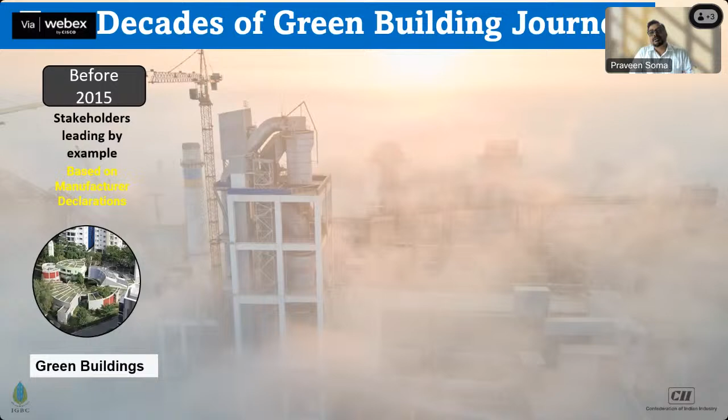As I told you, my topic is the paradigm shift. I'm going to talk about things related to past, current, and future, how it is going to happen. Before 2015, many stakeholders were leading by example, meaning nobody was pushing them, they voluntarily walked the talk. You talk about Godrej, Wipro, ITC, everybody championed the cause of going green by setting an example. They're inspirational buildings, starting with our own CII Godrej GBC building in Hyderabad in 2002. Today we are talking about so many building projects only because many projects already implemented on the ground showcase and inspire many architects today.

Then we saw the launch of Green Pro in 2015. Before Green Pro, we used to take declaration from manufacturers saying that my product is green, declaring 15% recycled content, or sourcing from 400 or 500 kilometers from a location. We had to depend on the declaration of the manufacturers. But once we have the Green Pro Eco label, due diligence is completely cleared, because it is a third party eco label, hence that is avoided. Just by having a Green Pro certificate, we used to clear the projects now.

Post 2016, we saw expansion of IGBC rating programs. We only had the IGBC new building rating program and IGBC green homes rating program. By 2016, we expanded to almost 34 rating systems, depending on building typologies. The ratings have been emerging. We developed rating programs with the help of a lot of stakeholders, maybe part of transit, railway, or green homes developed by 100+ stakeholders. Then we developed green cities, green townships, then 4-5 years back, net zero energy, water, waste, and last year we launched carbon. With every evolution, we are upgrading the rating programs, which is shifting from green buildings to green built environment.

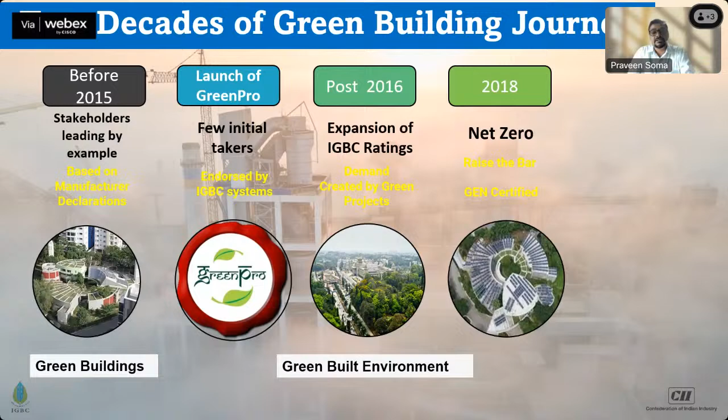Whatever energy we consume, close to 2.2 lakh units per annum, we have solar panels which are bifacial in nature, 135 kilowatt. They generate close to 2.3 to 2.4 lakh units per annum. That means it is generating more than our requirement. It's called a self-sufficient building, which is important to exhibit in the existing building, and also go green or go net zero.

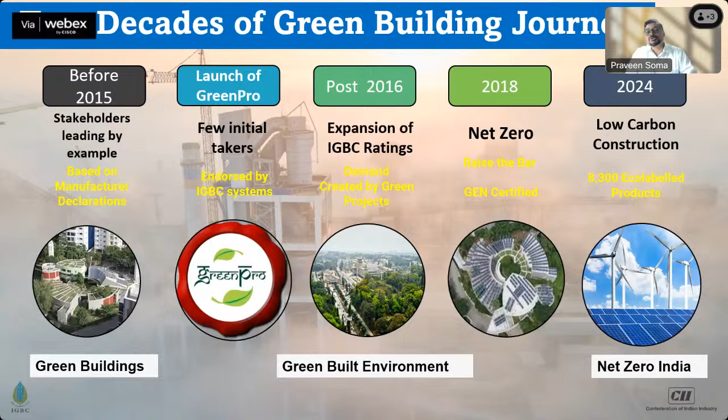That is very important. Today, I think the future is all about net zero, with vision from the Prime Minister also talking about 2070, moving towards net zero. So we should divert all our attention to more net zero projects. Even though we may have a handful of projects today, in the next 5 or 10 years you may see 1,000 projects aiming for net zero, with implementation also on the ground. We may see more technology happening.

So I've now fixed my focus onto the paradigm shift in design thinking, how it has transformed. For example, way back when we started the journey, the conventional electrical demand for 1 million square feet of a commercial building, the electricity requirement is close to 10 megawatt.

But what these green buildings did is halve the requirement. That means the load on the infrastructure is completely down by 50%. So when a building or community goes green, the load on infrastructure decreases by almost 50%. For the same 1 million square feet, these green buildings are designed such that it only requires 5 megawatt. That is the change it has brought. We never thought it could be brought down to 5 megawatt directly - that is the extent of designing.

Similarly with air conditioning, conventionally we designed open offices in a commercial building with a thumb rule of 180 to 200 square feet per ton of air conditioning. But green buildings have already showcased better. In fact, our own GBC building, we designed screw chillers, 50 tonners, for 1 ton per 350 square feet. That means 1 ton of air conditioning will cool 350 square feet.

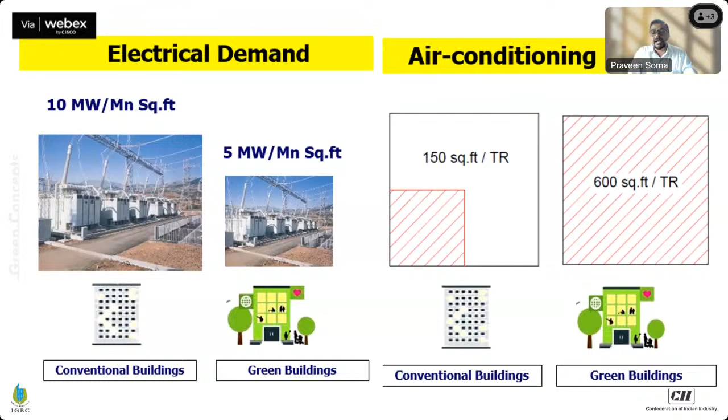So this is a paradigm shift happening in the air conditioning division. Similarly, we have seen lighting reduction. Way back, people will remember T12 tube lights with 55 watt chokes, then we saw T5 transition, then CFL transition. When you compare a T12 55 watt with a simple T5 28 watt tube light, the lighting lux level is the same, but power consumption is almost 50% reduced.

With the advent of LED lights, LED tube lights today with 10, 12, 15 watts, the lux level intensity is almost equivalent to what we achieved 10 or 20 years back, but the wattage is much reduced. In fact, we used to talk about 1.5 watt per square foot almost 20 years back. Then with the advent of green buildings, we thought 1 watt per square foot was the baseline. Today we are talking about less than 0.4 watt per square foot, with many projects achieving 0.3 to 0.35 watt per square foot, because of sensors, natural light intake into the space, and many other design factors.

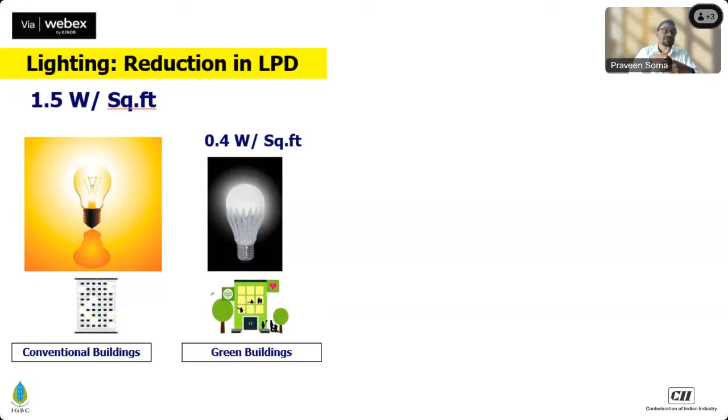So this is much reduced actually as I'm talking to you, the water consumption. How many of you remember NBC 2005? That version we used to talk about 150 to 160 liters per person per day for a residential building, and 45 to 60 liters per person per day for a commercial building. That is a baseline set by the National Building Code.

After the National Building Code got updated, green buildings established a different benchmark. We used to have 75 to 80 liters per person per day in residential projects, then less than 15 liters per person per day in commercial buildings, because in commercial buildings only urinals and water closets are there, no showers, so the consumption is much lower. Similarly in residential, we are seeing consumption per person per day reduced due to efficient water fixtures, the change in the water fixtures that we do.

For example, take a water closet. Suppose you have a single flush system, one flush uses 10 liters. If you flush 6 times a day, that's 60 liters gone. Whereas with a dual flush, using it once for solid flush and 5 times for liquid flush, assume it's a 6 liter, 3 liter dual flush: 1 into 6 is 6 liters, 3 into 5 is 15 liters, that's close to 21 liters against 60 liters saved. So that is the transition happening in water fixtures.

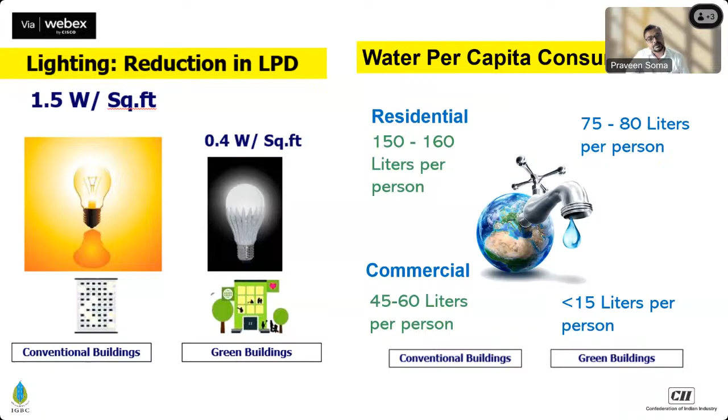Now, the role of materials, how materials can impact both energy efficiency and indoor air quality. I'm going to touch upon these things. Take a conventional building, meaning no knowledge of green but just constructed. What will we construct? We'll use red bricks and do RCC slabs, columns, everything.

But when you plan your site, you never give any thought to having natural light. We never give thought to ventilation standards, whether it is an energy efficient building. We never give any thought process to that, meaning in terms of an energy efficient envelope, we never consider this.

For example, go to Mumbai, there is no space between one building and another, meaning there are no setbacks. We've seen with our own eyes that even with a plot area, they construct on the entire plot, not even leaving a 5 feet setback. It's very tight, all 3 sides completely packed. Only the side facing the road may have windows or doors. Other sides, even if you have a window, there's no possibility of achieving light or views because other buildings block it, since every plot owner wants his site completely built up. That is the conventional construction I'm talking about.

What is the change in green buildings? With the help of all stakeholders, when we develop the holistic framework, we ensure the building envelope itself should be energy efficient. That is a complete paradigm shift, meaning the material used for the external facade should actually reduce heat ingress. How do you change it? You change the brick to a different material, you change the glass to a different material.

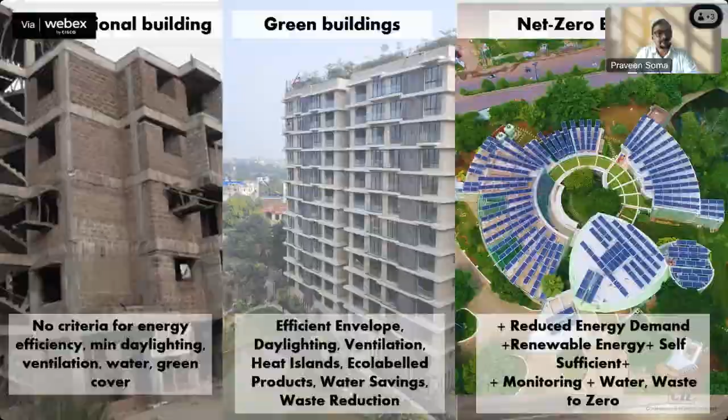Similarly, we are trying to achieve zero waste to landfill in the net zero concept. Let's talk about wall assembly. What are the options? Take a conventional simple red brick wall—the U value is close to 2.5 watts per square meter degree Kelvin.

Take a stone wall, it is around 1.25 watt per square meter degree Kelvin for a 300mm stone wall. Whereas when I shift from conventional red bricks to autoclaved aerated concrete blocks, the U value drops to around 0.6 watt per square meter degree Kelvin.

What is U value? U value is thermal conduction, the temperature difference between outside and inside. Outside is 40 degrees, you want how much? 24. That means from 40 to 24, the heat which is outside will come inside. To stop that for a longer time, you require a lower U value.

When you change the material, instead of red brick to AAC blocks, it can actually have more insulation, stopping the heat for a longer time, and the load on the AC will be reduced. That is the intent of U value. So always look for the U value of a wall assembly - the complete thickness of the wall you are constructing.

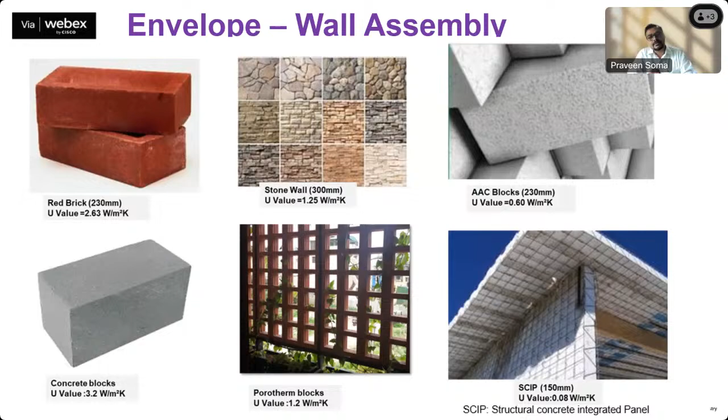It can be a concrete wall, or a porotherm brick, which also has a lower U value of 1.2 watt per square degree Kelvin. Similarly, people are now using sandwiched panels of XPS, that is thermocol, and concrete, so they get a lower U value also. It's called structural concrete integrated panels. These are some things happening in terms of research also.

Only glass - we can say two things. When you put a glass, you'll get two things. One is natural light definitely, but it also brings heat. So when designing a green building, we as a designer think in different directions: how can I reduce the heat ingress into the space while also getting light into the space. That is the challenge here.

We balance between the U value, that is thermal conduction, and the solar heat gain coefficient, and VLT, visible light transmittance. These are three things you should balance when designing a green building. A simple plain glass has got almost 0.9 VLT - whatever light is there will come inside, and also bring the heat. You cannot balance it.

Similarly, solar heat gain coefficient is like a shading device for the glass. Very high shading coefficient means more heat enters the space. In cold climates, we used to want more SHGC, 0.75 to 0.8, because we require heat coming inside. But once heat comes inside, we cannot stop it going back out unless we have a lower U value to contain the heat.

The baseline U value of a glass is close to 5.7 watt per square degree Kelvin, but with an efficient glass it comes down to 2.52. Sometimes with DGU it can come as low as 1.5 to 1.8. DGU glass is mostly needed in very hot regions like Mumbai, Kolkata, especially on west and south facades, where heat ingress increases the load on air conditioning. Commercial buildings with a lot of facade, we normally prefer DGUs there.

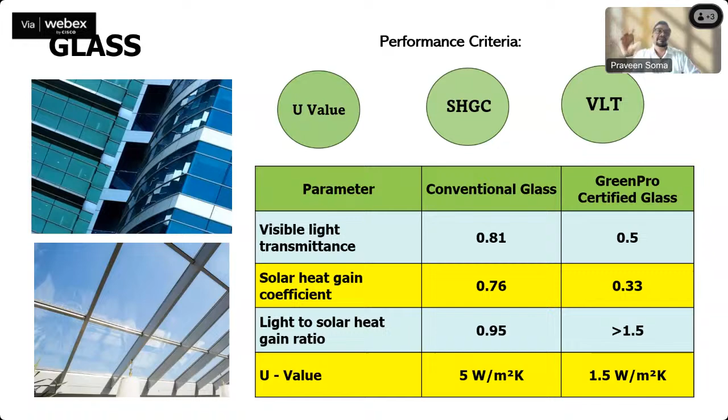Similarly, cement is one of the materials normally used in all buildings - every construction, plastering, concrete, RMC, everywhere. First, you should understand when you take OPC, ordinary Portland cement, the carbon emission is close to 950 kg CO2 per ton of cement. So what is changing in green buildings?

In green buildings, we promote Portland pozzolana cement and Portland slag cement. That means the cement content is replaced with fly ash by a certain percentage. For example, 30% of the cement is replaced with fly ash, or 40% is replaced with GGBS. What happens is the carbon content is reduced.

For example, let's assume you got a PPC. The carbon footprint is close to 650 to 700 kg CO2 emission per ton. That means already the carbon is reduced by almost 250 kgs when you use PPC instead of OPC. When you use PSC, slag cement, the carbon content drops to almost 450 to 500 kg CO2 per ton, which means almost 50% carbon is decreased. So you can proudly say: when I use OPC, this is my carbon footprint, but I used PSC, so the carbon footprint is 50% lower. That is the example you can set.

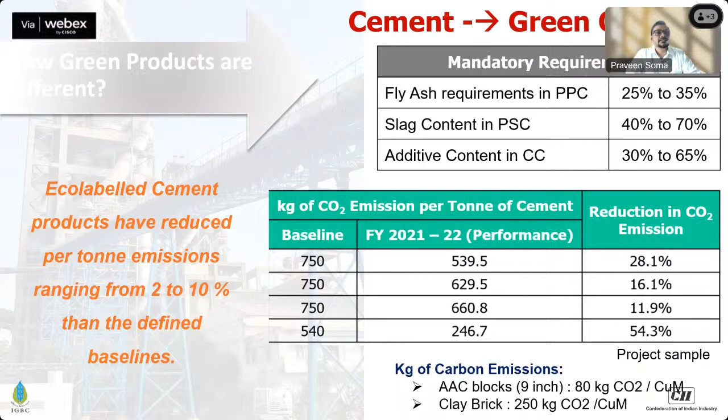Similarly, there are additive content in buildings. For example, instead of brick, suppose you use AAC blocks. The AAC blocks have a carbon footprint of 80 kg CO2 per cubic meter, whereas brick is almost close to 250 kg CO2 per cubic meter. That means almost 170 kg CO2 is decreased. When you use AAC blocks instead of clay bricks, the embodied energy decreases, and you can calculate these numbers accordingly. So everything is measurable when you go with ecolabelled products.

Similarly, I will introduce one more material called pervious concrete. The name indicates concrete, and that's absolutely right. For example, you take 6,000 square meters of area, close to 60,000 square feet. If you take a rainfall intensity of just 100 mm, close to Jaisalmer rainfall, the runoff coefficient is a property of the material. For example, 0.95 means when you pour water on a material, at the end you can capture 95% of the water actually.

That's called runoff coefficient. For example, you have sand. If you pour water, all the water goes inside, so the runoff coefficient is almost 0.1. There's no chance of water coming off the soil or sand; everything goes inside. Similarly, with high grass, when you pour water, at the end you can only capture maybe 50% or 40%, because by the time water travels from one end to the other, evaporation happens, and it also percolates into the soil. So runoff coefficient is a very important parameter.

For pervious concrete, compared to conventional concrete, the runoff coefficient is 0.5 to 0.6. That means it slows the runoff, allows water to percolate inside, and there's also a chance of evaporation. This helps in rainwater harvesting. For example, take the same 6,000 square meter area - with conventional concrete there's no chance of rainwater harvesting, everything goes to runoff or drains. Whereas with pervious concrete on the same area, without changing the strength of the concrete, you can still save 37% of the rainwater.

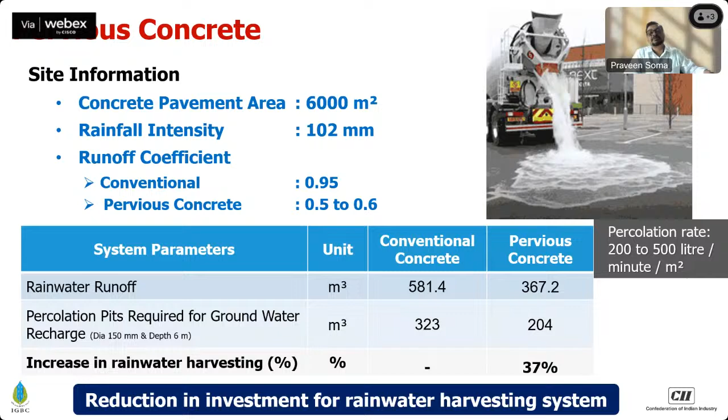This is a very important element - only in green buildings we shifted from conventional designs to biophilic designs. What do you mean by biophilic? For example, we have external landscaping - at least 15% of the site area should be landscaped, meaning vegetation or natural topography. That means when you don't disturb mother earth, we're actually keeping the food chain intact. Suppose you cut everything - for example in Bombay, you dig from compound wall to compound wall.

There is no space left, so they'll keep all the materials in a neighboring plot. That's why we're missing sparrows and dragonflies - there is no landscape element actually. So we are bringing outside landscape, plus we also promote indoor landscaping.

That means indoor plants, which are natural air purifiers. We have selected some 27 indoor plants - you can find this list in the interior rating program in annexure A. For example, take a money plant - it's a natural air purifying plant.

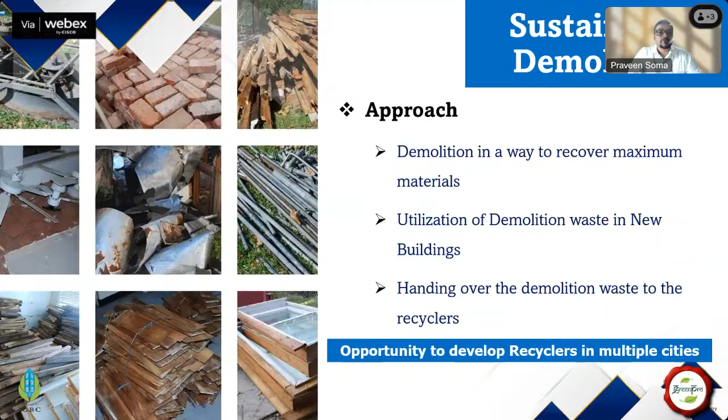And identify recyclers so you can hand over all this demolition waste to recycle, because it creates an opportunity to develop recyclers in multiple cities. As I told you, recycling is very important in India. When you use construction waste properly, we also promote materials made from C&D waste, construction waste - for example, coarse sand, since sand is not available today.

River sand is not available, so we are talking about depending on manufactured sand, actually M sand. We're also talking about recycled aggregates, which are crushed stone aggregates. These can all be made by using construction waste.

Wood waste can be made into MDF boards and particle boards. A lot of construction waste can be made into paver blocks and curb stones. We're already seeing these things happening today. Earlier it was very rare, but today, by design, they are thinking in the direction of aiming for net zero waste kind of projects. We have been seeing these things happening in reality.

For example, when I talk about material circularity, this building you're seeing is designed by Romi Khosla in Delhi. It is the Volvo Eicher building. What you're seeing are railway sleepers, that means old timber blocks. When they put these railway sleepers up for auction, they got a very cheap rate, so they bought it and used it as a building facade element. It has a shading element, of course it doesn't take any load, but it acts as a shading element for the entire facade.

Similarly, being a Volvo building, they have a lot of wood crates, pine crates, which come when they bring the Volvo machines. This is just a museum kind of thing. In some areas they got all these models, they brought the pine crates and wanted around 1,500 workstations. The architect had designed the workstations using the pine crates.

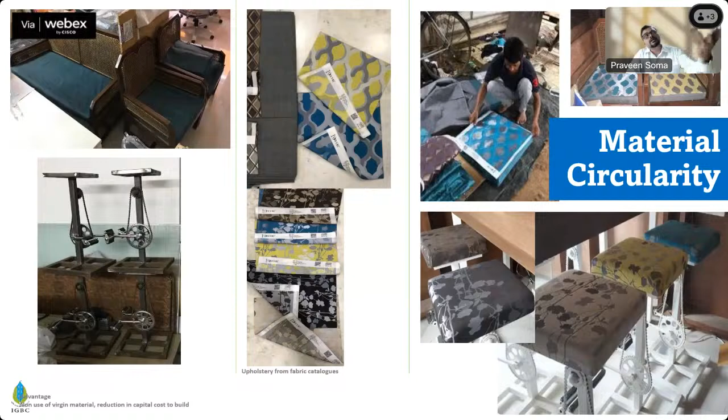This is one more element: the old fabric samples in the catalogs have been used as one of the sofa furnishings.

You can see the old cycle parts have been used as one of the elements in their own chairs to actually engage their own team members.

We also promote rapidly renewable material. That means instead of using teak wood or sycamore which takes 30 or 40 years, we can use timber which can be harvested in a cycle of less than 10 years. For example, bamboo, rubber wood, sugarcane, eucalyptus. These harvest much faster. In case you're unable to find these things, you can always go for engineered wood, that means it is not real timber, but made from wood and chips.

That is also promoted because, as you know, the world is losing forest cover equivalent to the land of Greece every year. So it is very important for our designers, architects, and young engineers to see how we should move towards alternate construction.

For example, steel - in 80 years we won't have any steel. In maybe 60 or 70 years, our grandchildren will see coal in a museum, because we are highly dependent on coal and there isn't much raw material available. Without steel or coal, it's very difficult to get oils and so many other things we depend on coal for - electricity, steel, buildings. We can't imagine it. But now we should shift our thinking towards alternative construction materials and move away from dependence on virgin resources.

Coming to the segregation part, we normally see segregation as just dry and wet waste, right? But in one of the projects, we saw segregation of simple dry materials including tetra packs, milk packets, newspapers, plastic packets, and plastic containers where you order food.

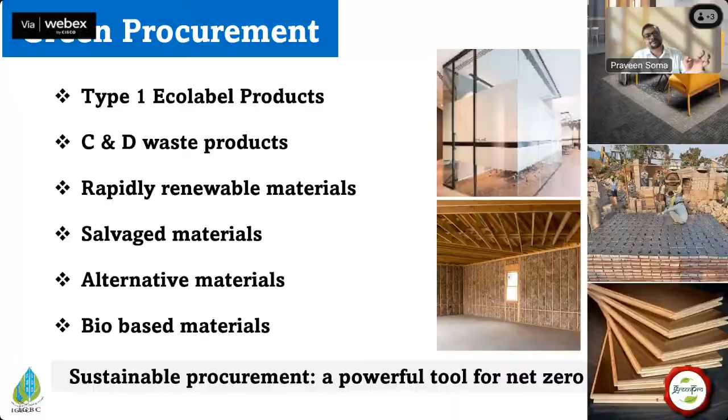So if you see the material sheet of an IGBC project I'm showing you, there's a list of all materials on the left hand side: description, RMC, steel, sand, many materials. Almost 93% by cost are eco-label products. It clearly gives the name of the organization with eco-label certification, location, everything, this is a Kolkata project, with distance and everything. This is how projects are submitting now. Earlier we used to have just tentative manufacturers, we didn't know if they were there or not.

But here we can verify very clearly. For example, if they say it's Ultratech cement, I can verify from our own certificate whether Ultratech is there or not, whether that cement company is listed. Whether the panache is there, we can check. Everything is listed by company now. This is how projects are submitting today, and that is the transition happening once again.

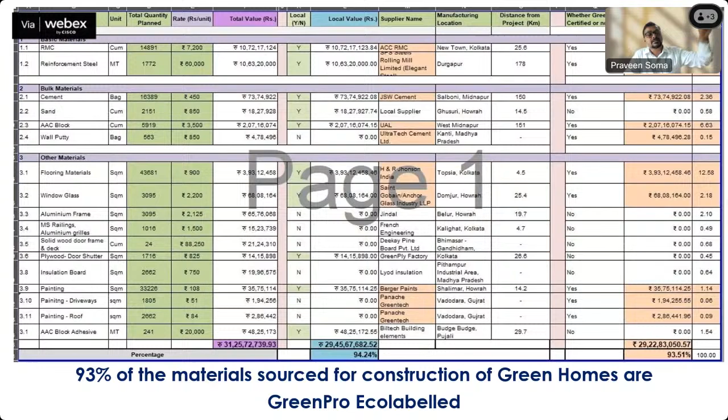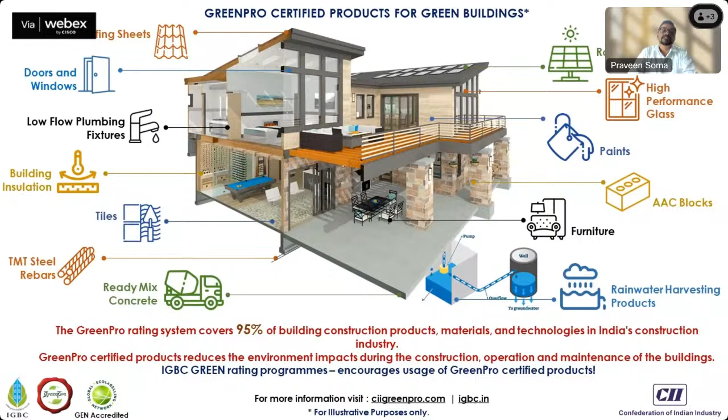Earlier I told you the declaration was 15%, 20% recycled content. Today it is completely changed. Take any building, any part of it, we have eco-label products today. We have close to 9,000 products available with eco-label, across 38 categories of whatever product you need in building construction. You can go to ciigreenpro.com and take the list, see the certificate, eligibility, validity period, and accordingly use it in your bill of quantities.

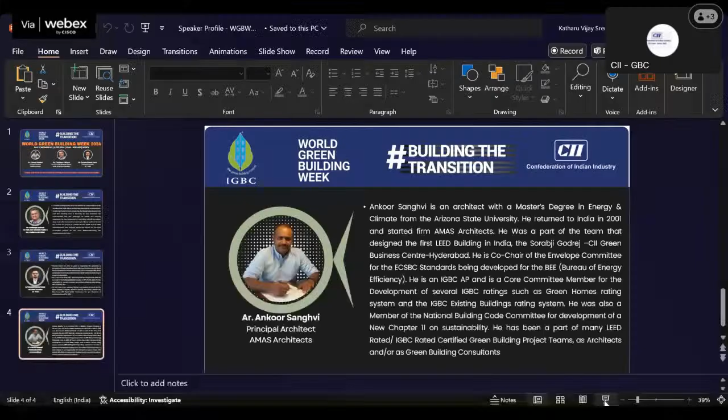He's an architect with a master's degree in energy and climate from Arizona State University. He designed the first LEED building in India, the Sorabji Godrej Green Business Center, Hyderabad. He's also co-chairman for the Envelope Efficiency Committee, and a core committee member who took part in developing certain IGBC rating systems, including the Green Home rating system and Existing Building rating system.

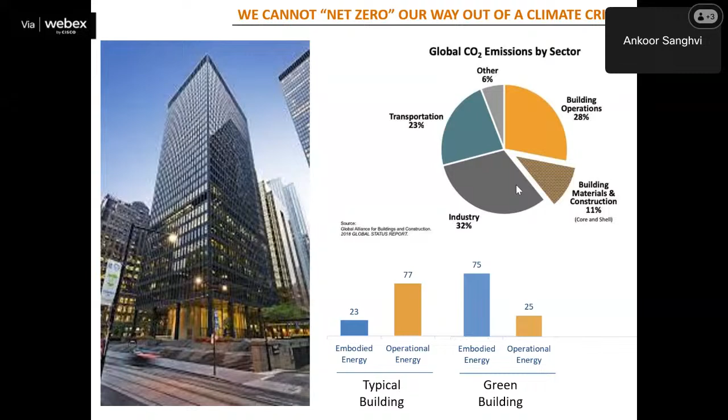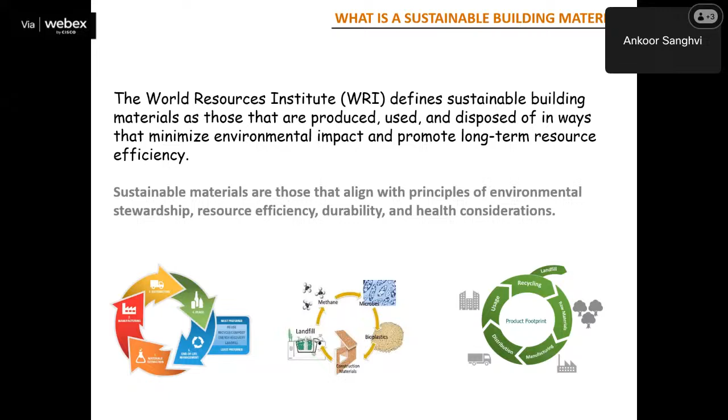I just wanted to highlight the definition of sustainable building material. There's an old definition from the World Resources Institute, which defines sustainable building materials as those that are produced, used, and disposed of in ways that minimize environmental impact and promote long-term efficiency. After that, there have been a lot of iterations, and now sustainable materials are defined as those that align with the principles of environmental stewardship, resource efficiency, durability, and health considerations. So now there are two more aspects we are talking about: durability as well as health considerations.

There are now five main features of any building material that can be called sustainable. One, it has to be environmentally friendly, have a low impact on ecosystems and biodiversity, reduce energy consumption, and lower carbon emissions. Second, it has to be resource efficient, using resources in a very optimized manner. Then you have something called the circular economy, which I'll show you in my next slide. You also have health and safety, where the material should contribute to healthy indoor environments by not emitting harmful substances.

This is the VOCs that Praveenji was talking about earlier. And the last feature is that they should encourage long-term durability, so that if the material has a long lifespan, it reduces the need for frequent replacements. So this is the basic general definition of sustainable materials.

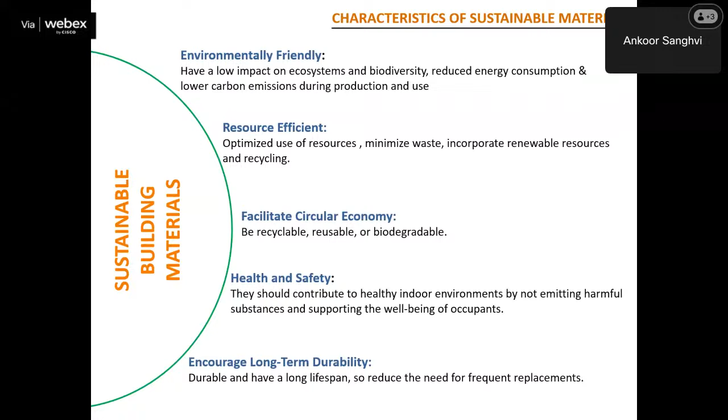Now, when we talk about life cycle cost analysis, we are not just talking about manufacturing the material. In fact, the whole life cycle of a material is divided into four parts. You have stage or module A, which talks about extraction of raw materials up to actually manufacturing them. Then you have section B, which talks about how to maintain and use the operational part of the material. Then you have section C, which is the end of life, where you demolish the building material, haul away the waste, and consider how it is recycled or disposed. The last one is beyond the life cycle, considering how the waste or debris can be useful, recovered, or reused.

Now, when we talk about a circular economy, your section D actually becomes section A1, and this whole linear module turns into a sort of loop, where the waste again becomes the raw material for the new products that are going to be made.

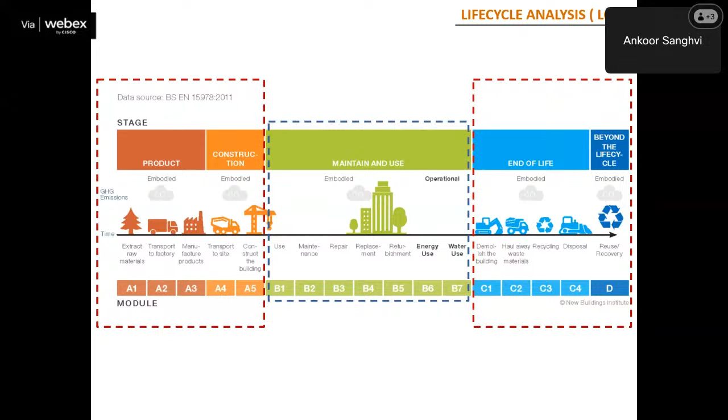So, what is the approach to using sustainable materials in buildings? The first one is that, if you look at Carl Elefante's words, the most sustainable building is the one that is already built. So the idea is that if you have existing building stock and if this can be retrofitted without having any major changes, make it more efficient, put in better quality glass, put in roof insulation, put in high reflective paint on the roof, and you actually retrofit the building and extend its life by another 50 to 60 years, then that is the most sustainable thing that you can do. That is the most sustainable material you would probably have, which is your existing building. Tata Sons House, the Bombay House that you have in Mumbai, and ACC House are prime examples.

You also have a lot of these old havelis and fortresses across Rajasthan and Madhya Pradesh, which are now being retrofitted into hotels and resorts. So these are prime examples of how buildings can be reused without having to build again.

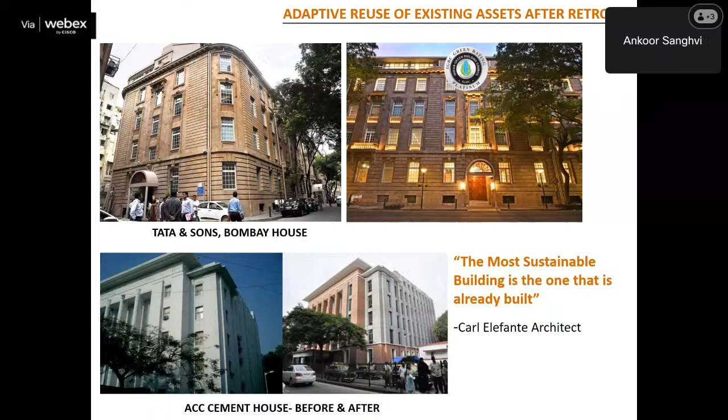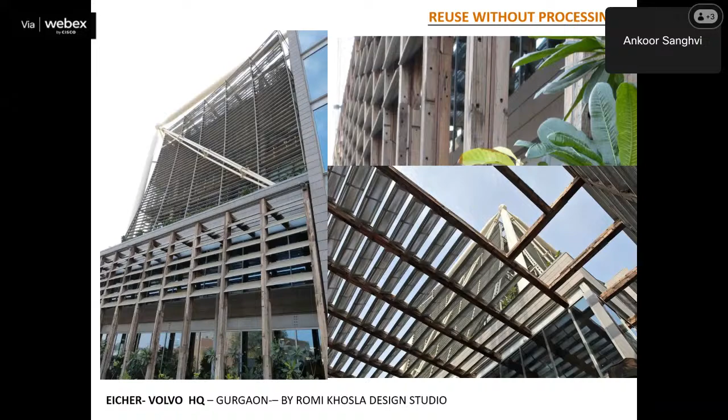Eicher House, Praveen has already shown you. But what I would like to point out over here is not just the fact that sleeper wood has been used, but the fact that we as architects and designers - and I don't know how many architects we have in the audience today - but as architects, we need to think differently. We need to approach the problem differently and think innovatively.

Three very classic examples. On the top left, you have this whole wall, which has been made with disposed of water bottles. Then you have this nomadic museum, which actually moves every year or every two years to a different location, and it is made from 40 shipping containers. And between the containers, the space that you have, which I don't have a photograph of over here, is actually supported by columns made with reinforced cardboard. So it's a very innovative use of what would have been a waste material, and also a material which can quickly be brought down and put up somewhere else.

And the third shot that you actually see is WRI's own office in Washington, where what they have done is that all the chairs are made from seat belts of cars that have been disposed of. So, junk cars - they've extracted the seat belts and made chairs from these seat belts. So the point I'm trying to make over here is that we need to think different, we need to think innovative, reuse or rather salvage what would potentially have been waste material.

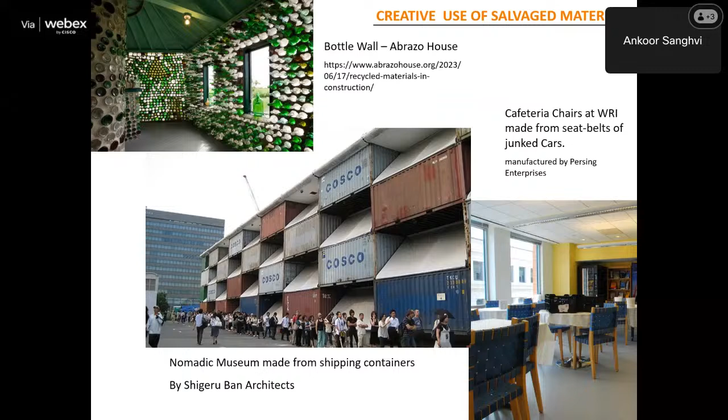Local materials have always been a low carbon alternative. It reduces the emissions related to transportation dramatically. Also, local materials tend to require less amount of processing. They support the local economy. They reduce waste because the waste can again be reused in the manufacturing process. There's preservation of biodiversity, and it is climate responsive.

What I've seen as an architect is that if you look at the local construction techniques or the vernacular architecture of any location, it'll actually give you clues on what is the best material to use in that particular climate. If you take the example of Rajasthan or Gujarat, where I belong, you have a lot of stone that is the local material over here, and probably in terms of environmental response, stone is the best material you can have for that particular climate. Or if you go to, say, a coastal region like Goa or coastal Karnataka, you have a lot of laterite being used. So wherever you have the local materials, that gives you the best clue on what would work for that particular climate.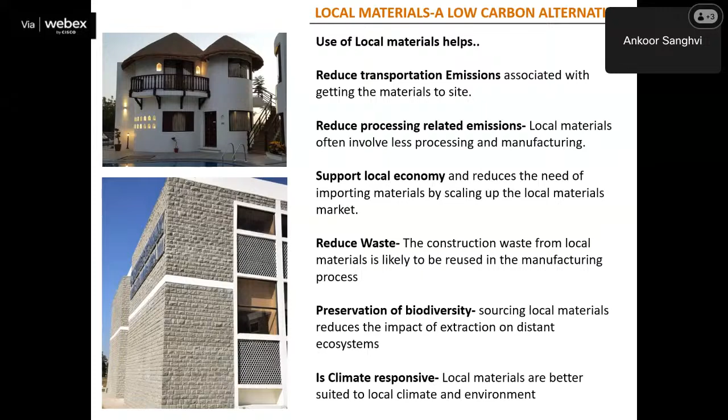In recent years, we have come across a lot of materials which are now being touted as green materials, which are probably genuinely green materials and are being researched into and developed. There is this tile manufacturer in Bombay, a group of architects and engineers, whose tiles do carbon upcycling - they actually take waste carbon from the environment and use that to manufacture the tiles. So that is probably a very sustainable way of manufacturing tiles.

Then you have hemp block. Hemp is a natural material - you have the Manila hemp - and this hemp, when combined with lime, forms a block which will keep absorbing atmospheric carbon dioxide throughout its life. And then you have straw bale or thatch, which also absorbs or sequesters atmospheric CO2. So you have these materials as well, which are very, very sustainable materials.

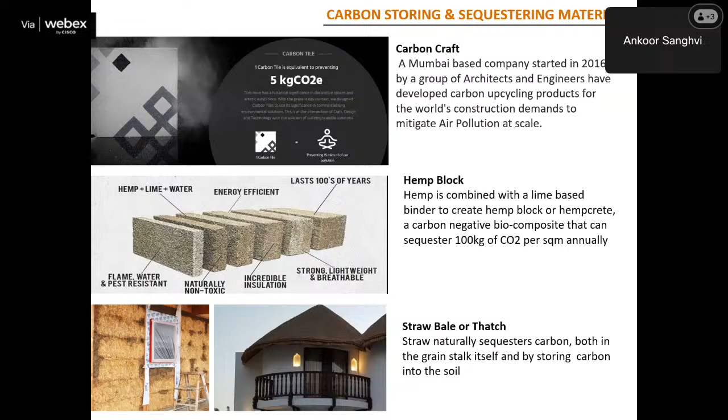But the problem with all of these materials, whether you talk about new materials or local materials, is that none of them are actually scalable. Today if you are building a skyscraper, say a 30-story building or a 200-meter building, which is what is going to be the need of the hour, we cannot actually have any alternative for either cement concrete or for steel or for aluminum.

So I identified this set of six materials which are such that if you want to scale up construction, which is what is going to be the need of the hour—because what has been built in the last 50 years, we are probably going to be building in the next 10 to 15 years, so the scale of construction required is fantastic—these are the materials which will actually help us achieve that scale.

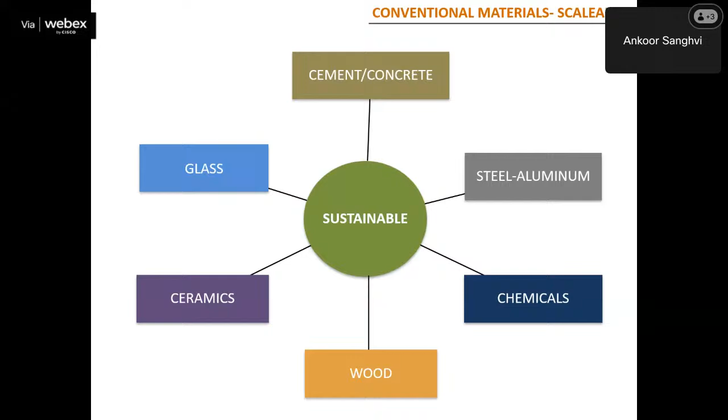And for that, we need to figure out a way on how to make these materials green, or at least make them less environmentally harmful.

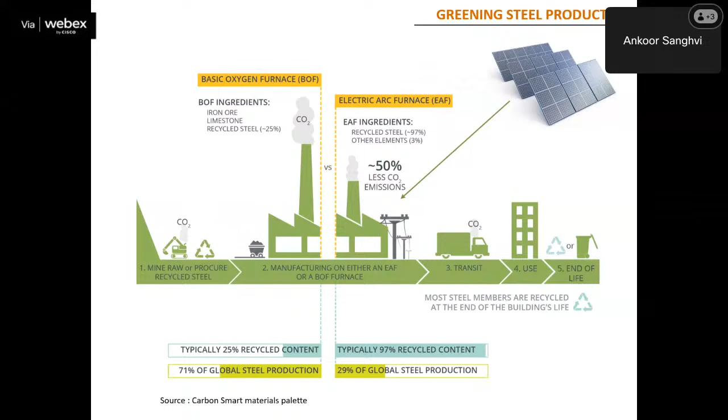When it comes to steel, there are multiple processes of manufacturing. You have the most popular, which is BOF furnace steel, and then electric arc furnace. The difference between the two is that a very high recycled content is possible with electric arc furnace. And if the source of energy for electric arc furnace is solar photovoltaic cells, then the carbon footprint of EAF manufactured steel is about 50% lower than conventional steel.

Similarly, Praveenji also talked about green cements. I'm going a step beyond what he was talking about. You have ferrocrete cement, Ekkomaxx cement, geopolymer cements. All of these cements use different chemicals and are manufactured in such a way that they absorb a good amount of CO2 from the atmosphere, and they can actually be turned green.

Unfortunately, these cements work out to be very expensive because they are not used very frequently. So there's this classic case of what comes first, the chicken or the egg. But if we start using more and more of these green cements, and if the volumes increase, we may actually be able to bring down the cost of green cement.

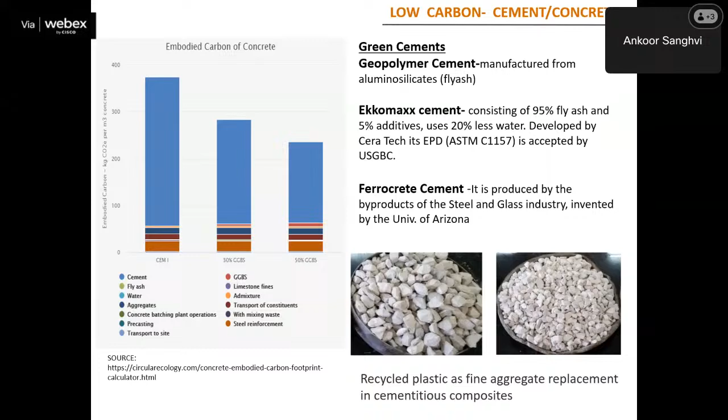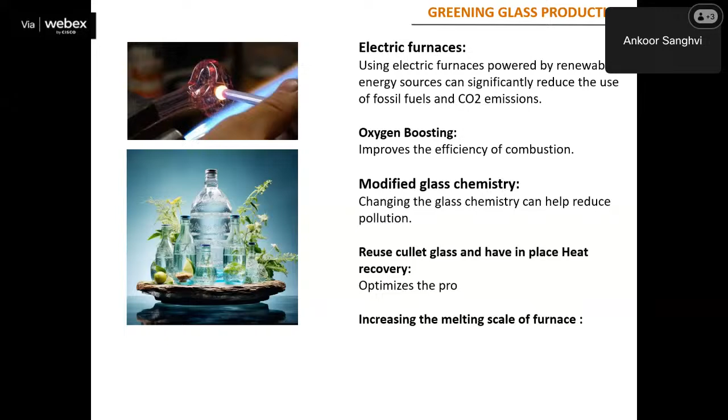With glass, you again have manufacturers who are talking about ways in which they can make glass production more green, more resource efficient. But how do we incentivize all of these manufacturers to put money into R&D to actually go about changing their production lines to make products that are more environmentally friendly?

So again, you have this eco-labeling that Praveenji was talking about—environmental product declarations, EPDs. If products have these EPDs, then these products are green. And what happens with EPDs is that they follow certain principles.

You have life cycle assessment, which is cradle to grave, done for an EPD. You have standardization—they follow international standardization codes, 14025, 15804. These are the typical standards used for making green products.

They mention the quantitative data of the GWP, or global warming potential, of a particular material, and the ozone depletion potential of a material. So these EPDs include all of this data, and also this modular approach, which is very important, where the declaration gives you the amount of resources being used at different stages of manufacturing of a typical material.

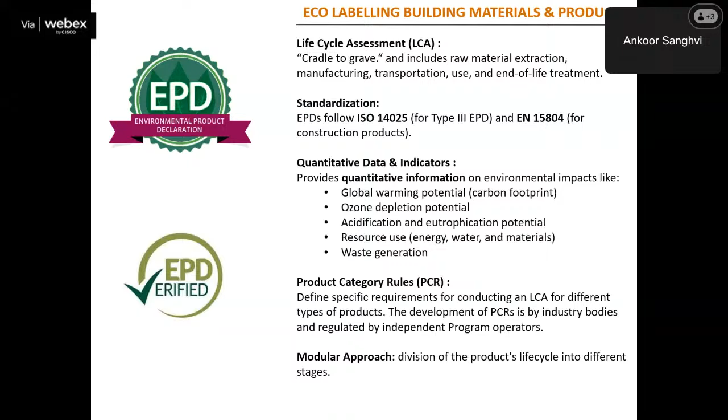CII IGBC has the Green Pro, and Green Pro also follows most of the parameters. There's a convergence with EPD to a great extent, and for certain parameters, Green Pro actually goes beyond a few of the EPDs.

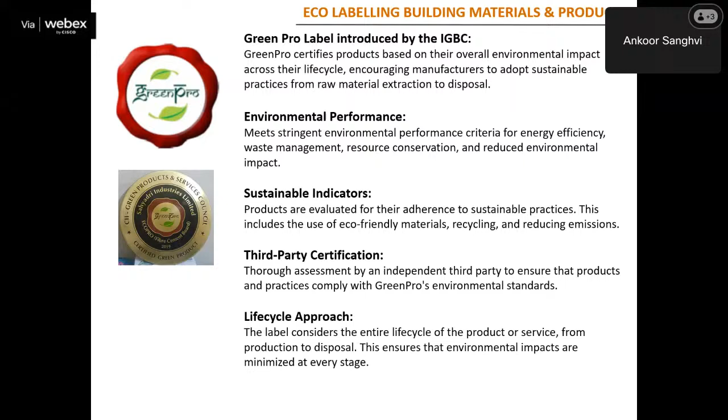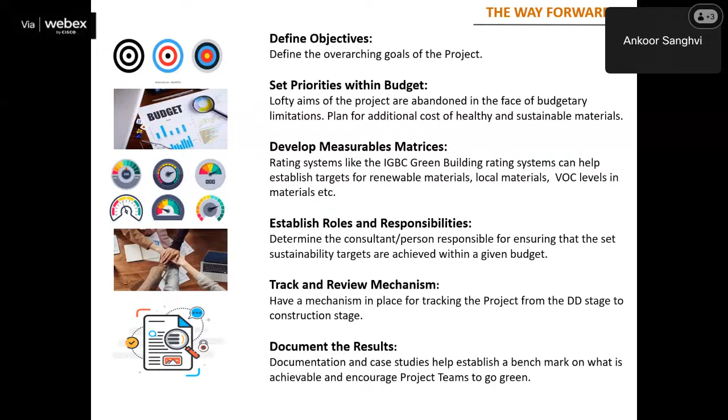I'd just like to end with a quote by Sir Norman Foster: 'The choice of materials for sustainable construction is not just about saving the planet, but also about designing better environments for people to live in and work in.' Thank you.